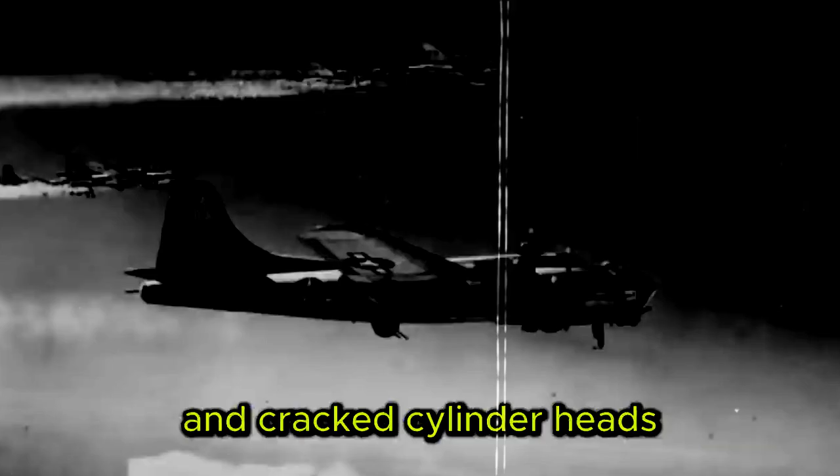Not the clean, controlled combustion that turned propellers and won dogfights, but pre-ignition, the uncontrolled explosive violence that shattered pistons and cracked cylinder heads. The tachometer needle danced wildly. Cylinder head temperature spiked past 500 degrees Fahrenheit. Wagner had no choice but to abort, diving away from the Zero while his engine rattled like a machine gun with broken timing. He landed at Clark Field with 2 cylinders misfiring and metal fragments suspended in his oil.

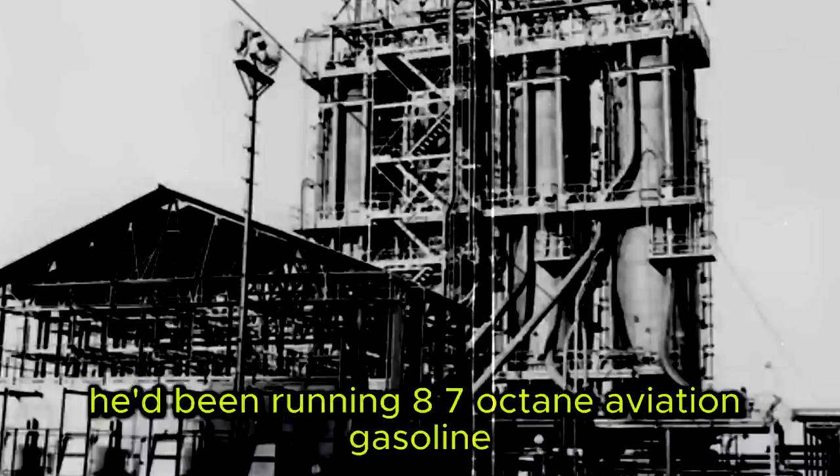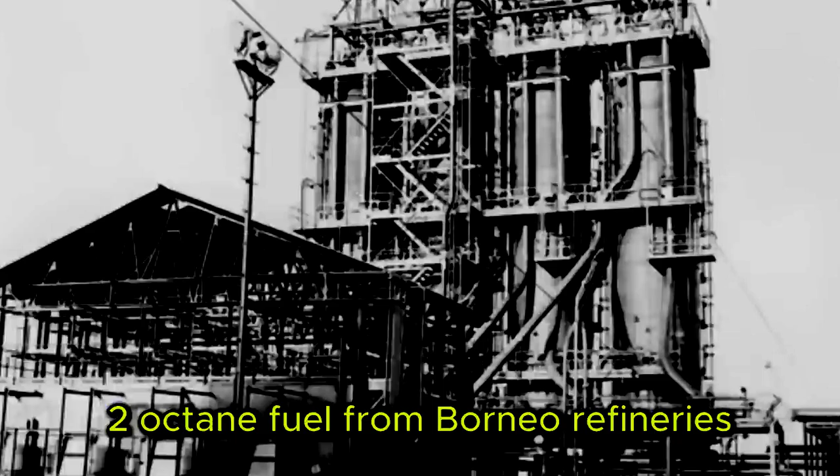The mechanics found the problem immediately. He'd been running 87 octane aviation gasoline, standard U.S. military issue, in an engine designed for sustained high-altitude performance. The Japanese Zero that escaped had been powered by 92 octane fuel from Borneo refineries captured just days earlier. Wagner survived. Hundreds of other American pilots would not. This wasn't an isolated incident. It was a mathematical certainty written into the periodic table itself.

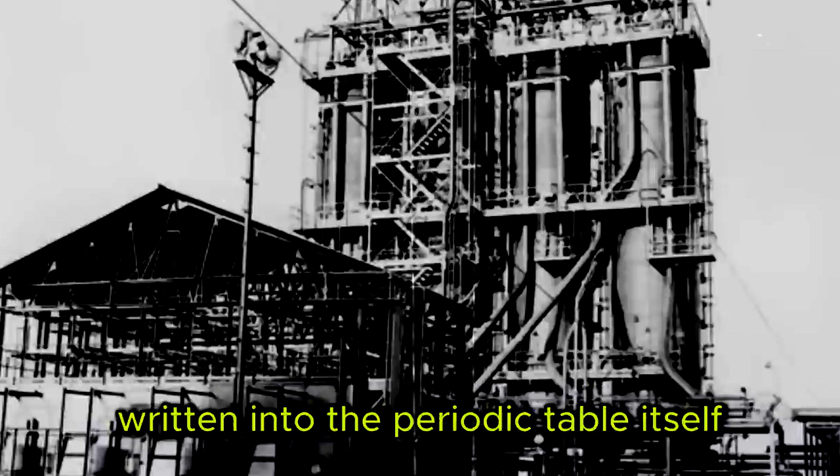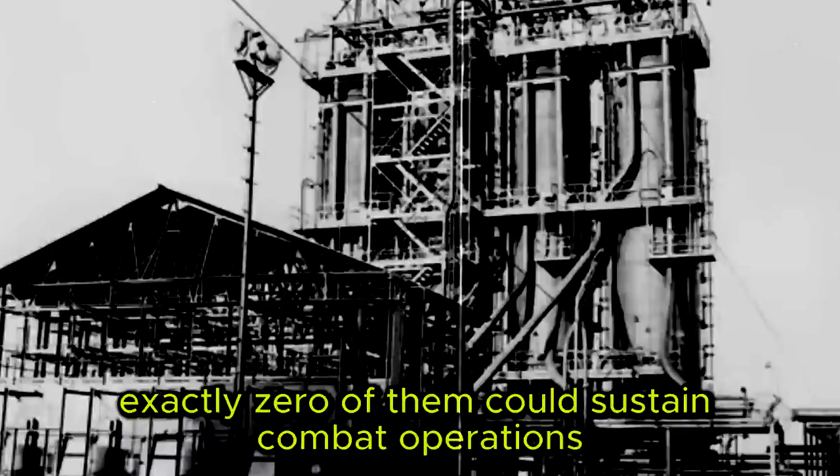In December 1941, the United States Army Air Corps had 2,846 combat aircraft. Exactly 0 of them could sustain combat operations above 20,000 feet on domestically produced fuel without risking catastrophic engine failure. The British Royal Air Force, by contrast, had been flying on 100 octane fuel since May 1940, 15 months of technological advantage that had literally saved Britain during the Battle of Britain.

American petroleum engineers understood the chemistry perfectly. They knew that octane rating measured a fuel's resistance to detonation under compression, that higher octane fuel allowed higher compression ratios and supercharger boost pressures, that every point of octane translated directly into horsepower and altitude performance.

The Merlin engines in Spitfires generated 1,470 horsepower on 100 octane British fuel. The same engine design produced barely 1,030 horsepower on 87 octane American gasoline. This wasn't a 40% performance gap. In aerial combat, it was the difference between life and death, between catching a Messerschmitt Bf 109 at 30,000 feet or watching it escape into the sun.

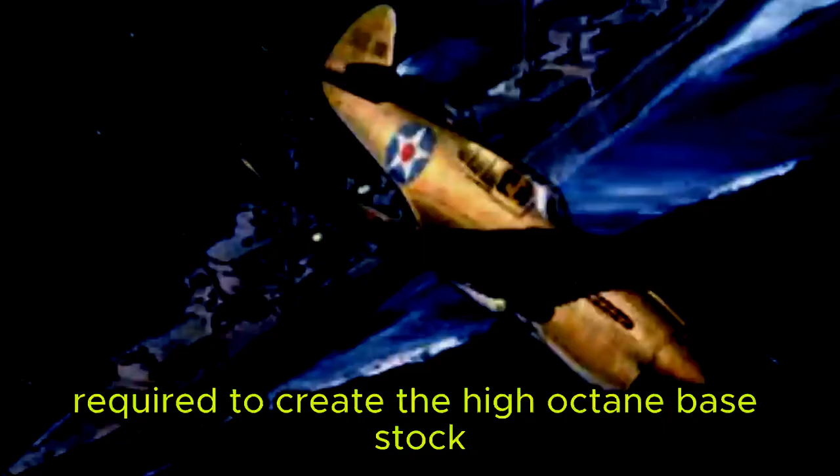But knowing the chemistry and actually producing 100 octane fuel at industrial scale were separated by a chasm of metallurgical impossibility. The problem wasn't the octane-boosting additives. Tetraethyl lead had been available since 1923, synthesized by Thomas Midgley Jr. at General Motors. The problem was the catalytic alkylation process required to create the high-octane base-stock hydrocarbons in the first place. Specifically, the problem was hydrofluoric acid.

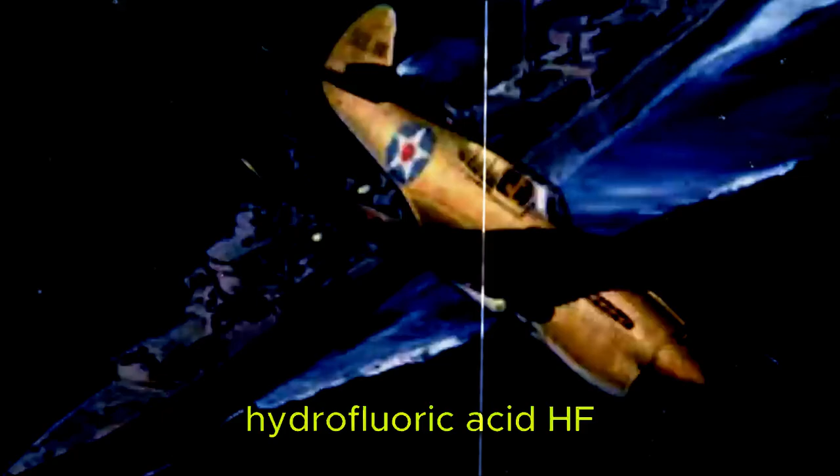To convert low-value refinery gases like butylene and isobutane into high-octane alkylate, the chemical backbone of aviation gasoline, required a catalyst so corrosive, so phenomenally reactive, that it could dissolve glass, concrete, and human tissue with equal efficiency. Hydrofluoric acid, HF, with a pKa of 3.17, attacked every known structural material. It penetrated steel through microscopic grain boundaries. It formed hydrates that expanded and cracked welds.

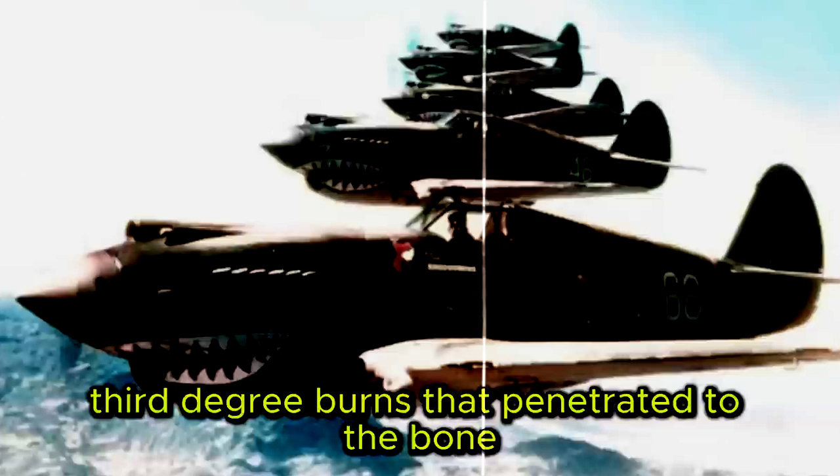At concentrations above 70%, it became hypergolic with water, releasing heat so intense that a single drop on human skin would cause third-degree burns that penetrated to the bone, often requiring amputation. The pain was described by chemical engineers who'd experienced HF exposure as being stabbed with a red-hot knife that keeps twisting. This wasn't a substance you handled with rubber gloves and good intentions. This was a chemical weapon that happened to produce 100 octane fuel as a byproduct.

The engineering challenge was almost absurd in its difficulty. To produce aviation gasoline at the volumes required for global war, the U.S. would eventually consume 20 billion gallons between 1942 and 1945, required alkylation reactors operating continuously at 35-50 degrees Fahrenheit, maintaining precise temperature control, while circulating thousands of gallons per hour of a substance that could eat through quarter-inch steel plate in under 48 hours of contact.

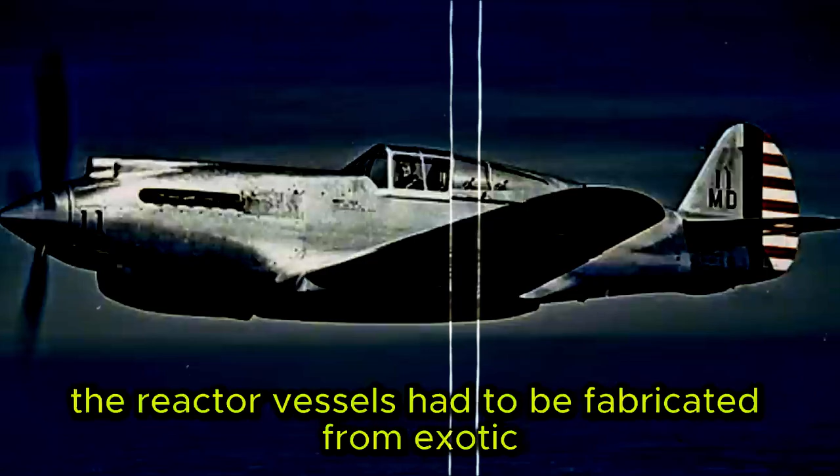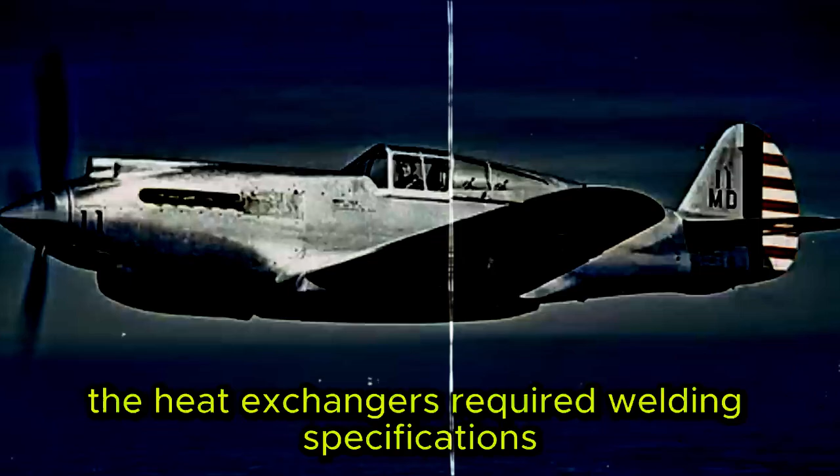The reactor vessels had to be fabricated from exotic nickel alloys that in 1940 were barely available for laboratory equipment, let alone 50-foot-tall industrial towers processing 5,000 barrels per day. The heat exchangers required welding specifications so precise that a single microscopic crack would allow HF to contact cooling water, creating hydrofluoric acid vapor clouds capable of killing refinery workers half a mile downwind.

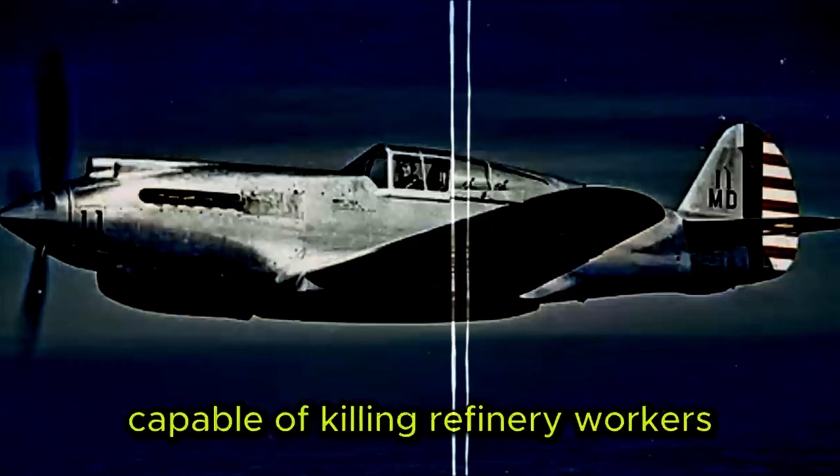The safety protocols required isolation valves that could seal in milliseconds, pressure relief systems that could vent catastrophic failures without creating toxic clouds, and emergency shutdown procedures that could freeze the entire process before acid contact exceeded critical exposure limits.

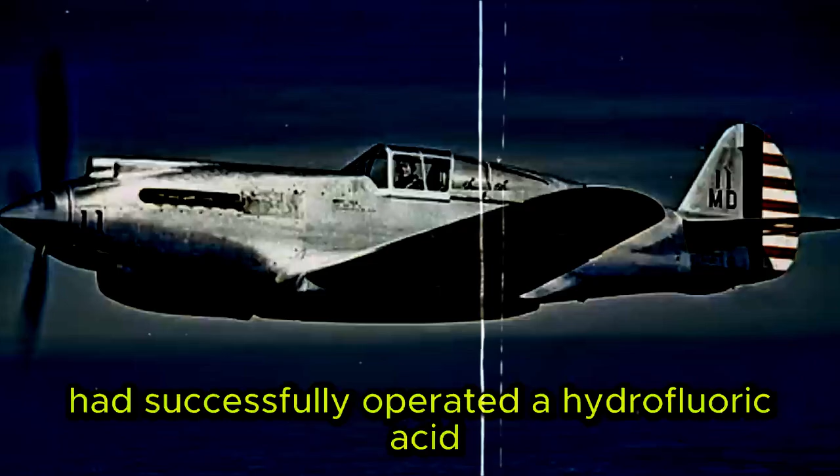In 1940, exactly one company in the world had successfully operated a hydrofluoric acid alkylation unit at commercial scale. It was Plant 5 at the Humble Oil Refinery in Baytown, Texas, and it had the production capacity to fuel approximately 400 fighter aircraft.

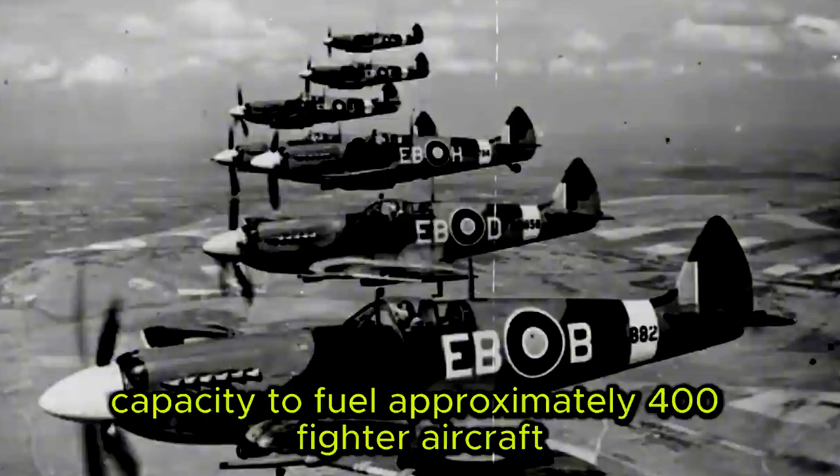Total, not per day. Total. The company that built that first impossible reactor would become the architect of America's chemical warfare against the Luftwaffe, though their weapon was never dropped from a bomb bay.

They were the M.W. Kellogg Company of New York, and in 1940 they employed exactly 847 people, most of them welders and pipe fitters, who'd spent the Depression building petroleum crackers and distillation towers. Their chief chemical engineer was a 42-year-old MIT graduate named Robert T. Haslam, who'd written his doctoral thesis on catalytic cracking in 1926 and understood petroleum chemistry the way a concert pianist understands chord progressions. Not as academic theory, but as physical intuition developed through thousands of hours of failure.

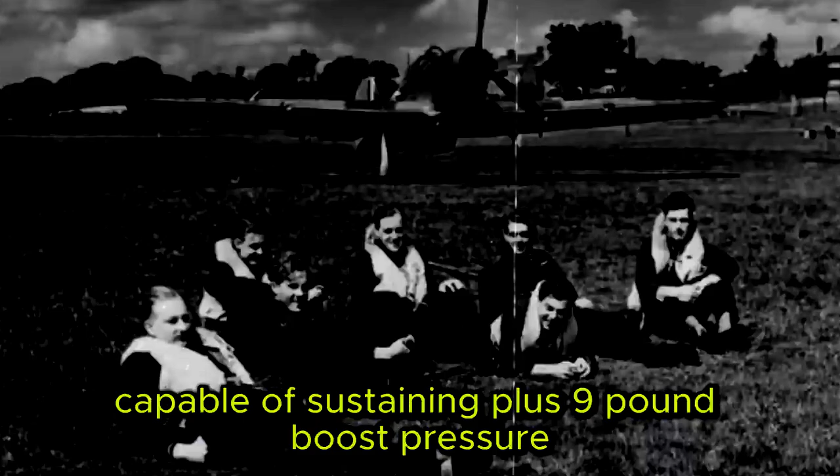Haslam had been experimenting with hydrofluoric acid alkylation since 1938, working with patents originally developed by British chemist Jesse Dubbs and later refined by the Anglo-Iranian Oil Company. The British had cracked the octane problem first, motivated by the same military necessity that would later drive American development. In 1935, the Air Ministry had issued specification DTD-224 requiring aviation fuel capable of sustaining plus 9-pound boost pressure in supercharged Merlin engines, an impossible requirement for conventional gasoline that detonated violently above plus 3 pounds.

The solution was alkylate blending, and by 1939, Britain had 6 operating HF alkylation units producing 60 million gallons annually. When France fell in June 1940 and the Battle of Britain began, every Spitfire and Hurricane that climbed to intercept the Luftwaffe was burning British 100 octane fuel, a strategic advantage as decisive as radar and as invisible as radio waves. The Americans were 3 years behind, and the gap was widening.

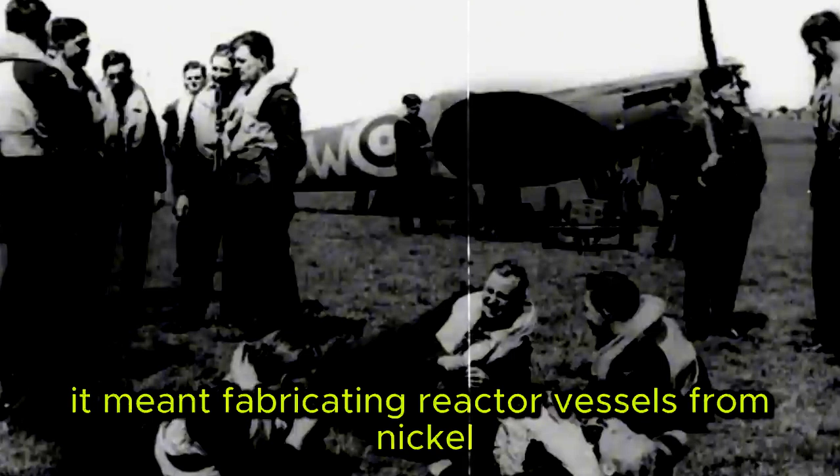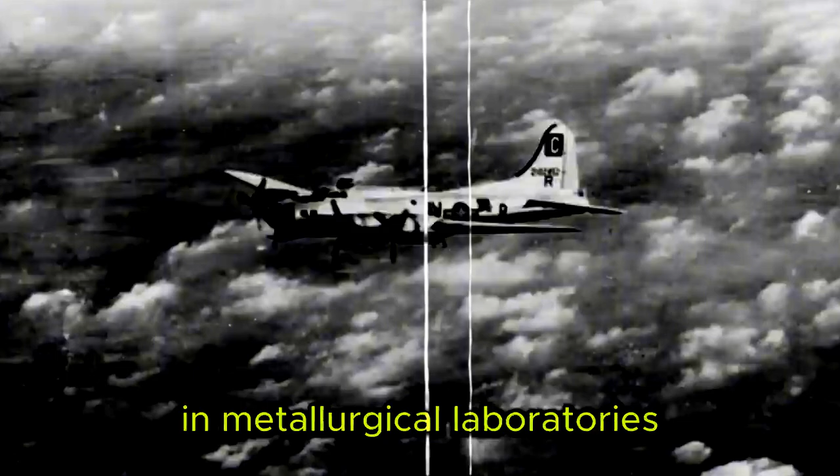It meant fabricating reactor vessels from nickel-molybdenum alloys that were still experimental in metallurgical laboratories. It meant training thousands of chemical operators to handle a substance so dangerous that a single procedural error could kill everyone within 200 yards. It meant solving corrosion problems that had defied every material scientist in the petroleum industry.

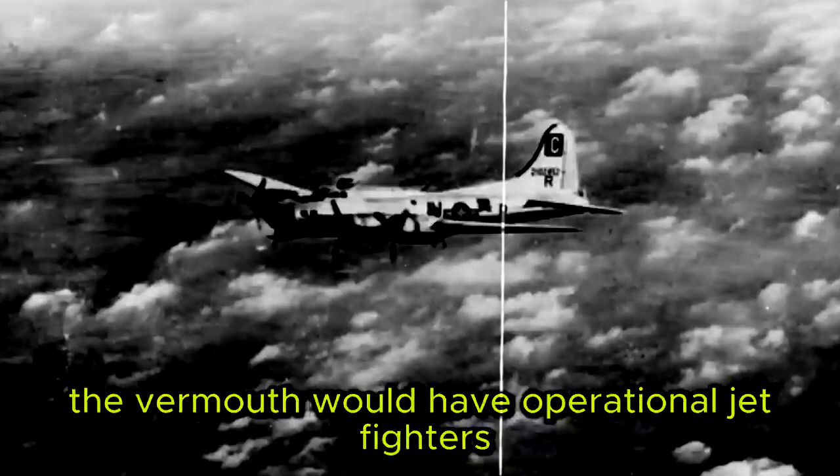And it meant doing all of this in 18 months, because by January 1942, American intelligence estimates suggested the Wehrmacht would have operational jet fighters by 1944, and piston engines running on 87 octane fuel would be obsolete before they left the assembly line. Robert Haslam understood the stakes with crystalline clarity.

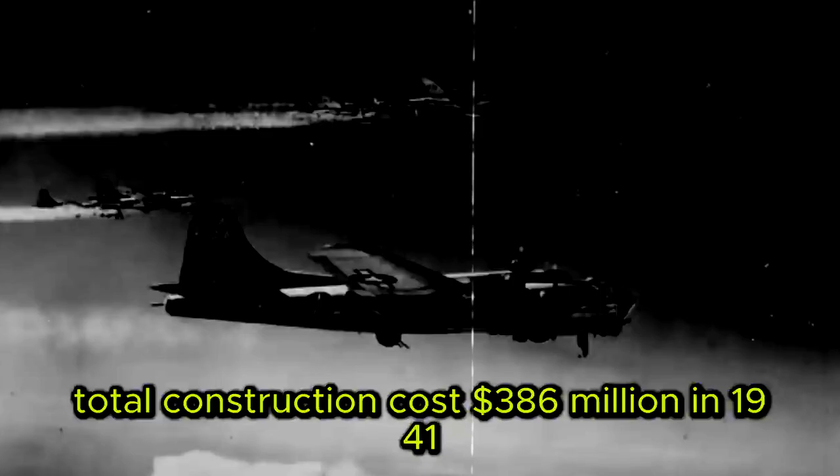On February 3, 1941, 9 months before Pearl Harbor, he stood in a conference room at the Petroleum Administration for War in Washington, D.C., and presented a proposal that would have seemed insane to anyone who hadn't spent 15 years wrestling with petroleum chemistry. He proposed building 40 HF alkylation units in 24 months, each capable of producing 15,000 barrels per day of alkylate base stock. Total construction cost $386 million in 1941, equivalent to $8.2 billion today.

Total hydrofluoric acid inventory across all facilities, 47 million pounds in continuous circulation. Total potential casualties in the event of catastrophic failure, incalculable, but likely in the tens of thousands if a major release occurred near a populated area. The procurement officer from the War Department asked the obvious question, "Mr. Haslam, what happens if one of these reactors fails in, say, Baton Rouge or Los Angeles?" Haslam's answer was documented in the meeting minutes. "We design them not to fail, sir, because the alternative is losing the war."

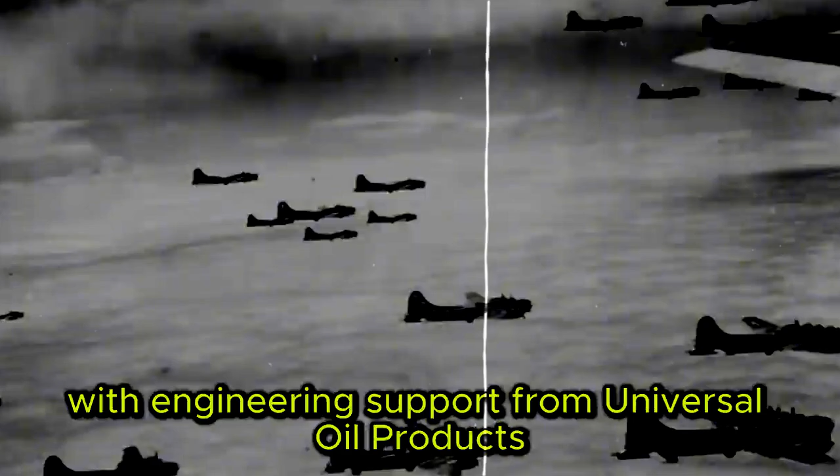After the contract was signed on March 15, 1941, M.W. Kellogg would serve as primary contractor, with engineering support from Universal Oil Products, Standard Oil of New Jersey, and the Anglo-Iranian Oil Company, which agreed to share British alkylation patents under Lend-Lease provisions. Construction began simultaneously at 17 refinery sites across Texas, Louisiana, California, Oklahoma, and Pennsylvania.

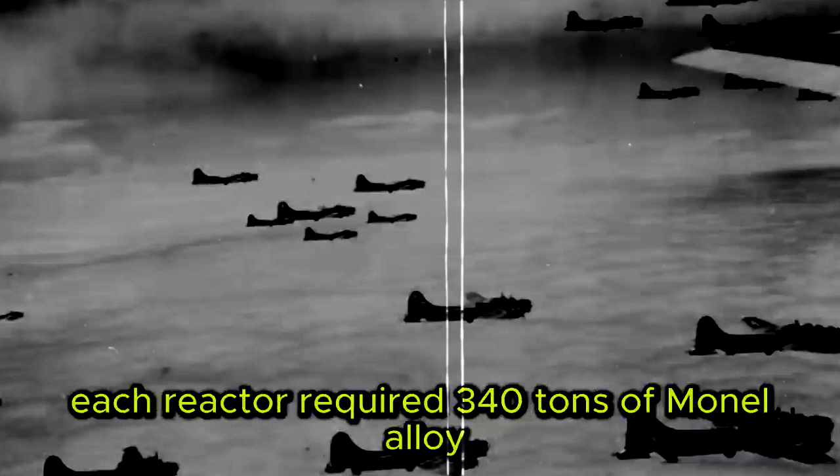The first challenge was materials procurement. Each reactor required 340 tons of Monel alloy, a nickel-copper composite containing 67% nickel, 30% copper, and 3% iron, with corrosion-resistant specifications so tight that a variance of 0.5% in nickel content would reduce acid resistance by 40%.

They agreed to divert their entire 1941 output to alkylation reactor fabrication in exchange for guaranteed War Department contracts through 1945. By June, Monel ingots were arriving at fabrication plants in Philadelphia and Gary, Indiana, where they were forge-welded into cylindrical shells 12 feet in diameter and 48 feet tall, with wall thickness varying from 2 inches at the base to 1.25 inches at the top to account for pressure gradients.

The welding specifications alone filled a 247-page manual. Every seam required X-ray inspection at 200 kilovolts penetration to detect micro cracks larger than 0.003 inches. Every weld had to be stress-relieved at 1600 degrees Fahrenheit for 14 hours, then cooled at exactly 100 degrees Fahrenheit per hour to prevent crystalline grain boundary formation that would create acid migration pathways.

The welders themselves required 6 months of specialized training because Monel welding behavior was fundamentally different from steel. The metal had to be preheated to 400 degrees Fahrenheit, welded with argon shielding gas to prevent oxidation, and post-treated with pickling solutions to remove surface contaminants.

A single contaminated weld could create a corrosion cell that would penetrate the reactor wall in 6 weeks of operation, releasing thousands of gallons of hydrofluoric acid into a refinery processing volatile hydrocarbons at 800 degrees Fahrenheit. The consequences would make the Hindenburg disaster look like a stovetop accident.

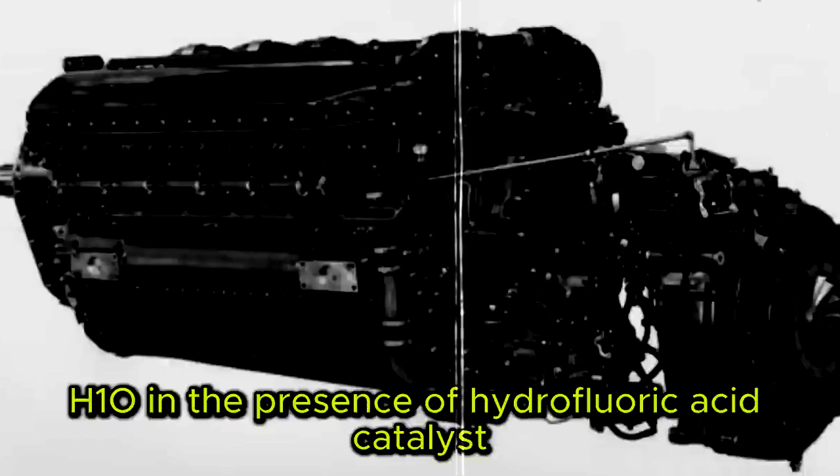While the reactors were being fabricated, Haslam's engineers were solving the even more complex problem of how the alkylation process actually worked at the molecular level. The chemistry was deceptively simple on paper. Combine isobutane, C4H10, with butylene, C4H8, in the presence of hydrofluoric acid catalyst, and the result was iso-octane, C8H18, a branched-chain hydrocarbon with an octane rating of 100, but the reaction pathway was anything but simple.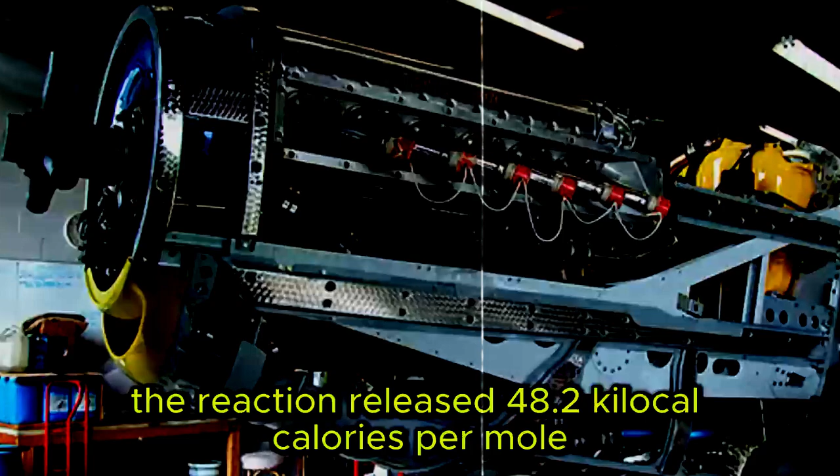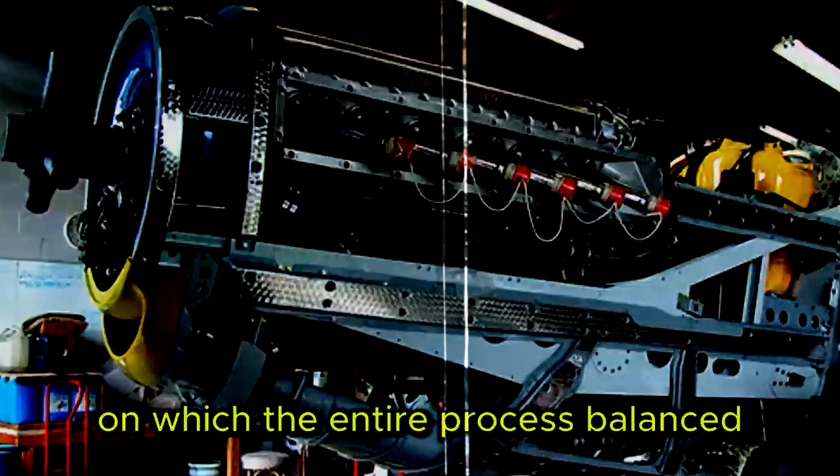The reaction released 48.2 kilocalories per mole, and that heat had to be removed continuously or the entire reactor would enter thermal runaway, boiling the hydrocarbons and creating a pressure wave that would rupture the vessel. Temperature control was the knife edge on which the entire process balanced. At 32 degrees Fahrenheit, the reaction rate slowed to commercially useless levels. Producing alkylate required 14 hours of residence time instead of 2.

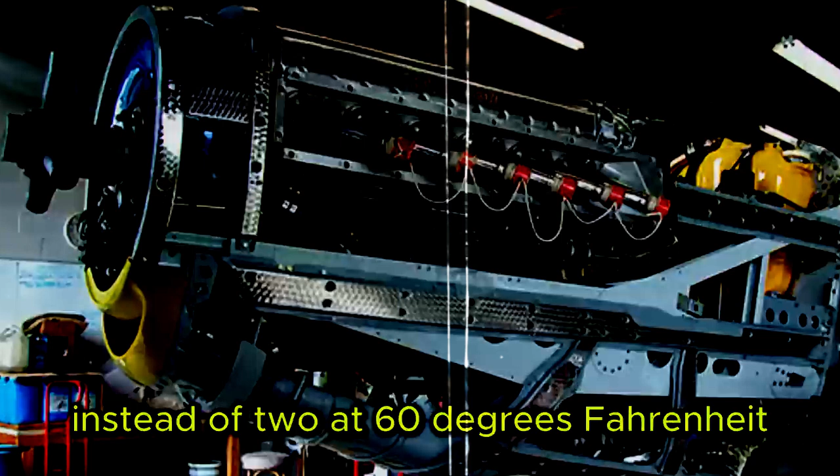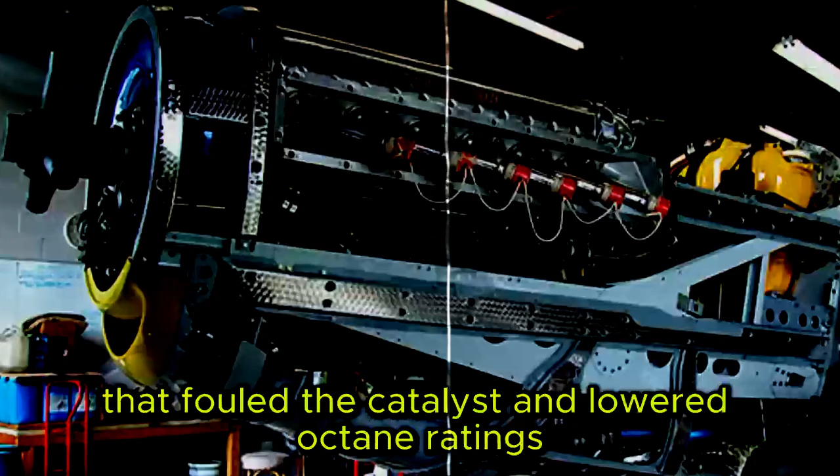At 60 degrees Fahrenheit, the reaction accelerated but selectivity collapsed. Instead of forming clean isooctane, the carbocation intermediates underwent rearrangement reactions, creating a mixture of heptanes, hexanes, and polymer tars that fouled the catalyst and lowered octane ratings. The optimal temperature window was 38 to 42 degrees Fahrenheit, maintained within ±1.5 degrees Fahrenheit across the entire reactor volume.

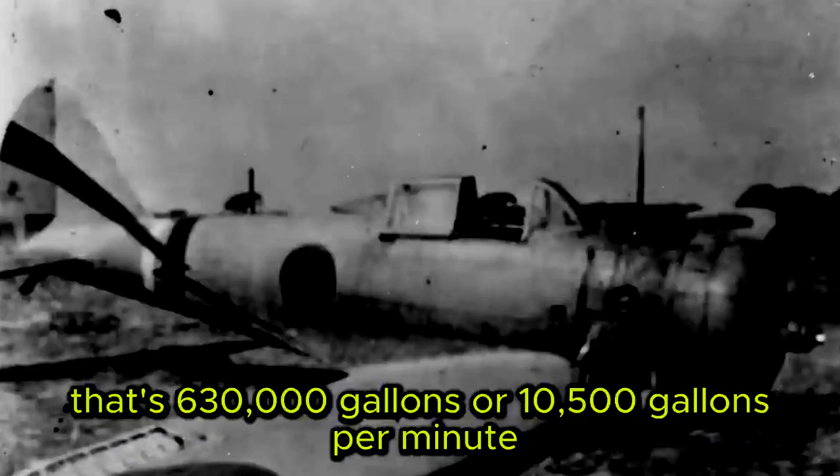In a vessel processing 15,000 barrels per day, that's 630,000 gallons or 10,500 gallons per minute. Maintaining that thermal precision required heat exchanger surface area equivalent to a football field, with coolant flow rates of 50,000 gallons per minute of chilled water. The cooling system consumed 12 megawatts of power per reactor, more than the entire electrical demand of a town of 15,000 people.

Multiply that by 40 reactors, and the alkylation program required the construction of 6 dedicated power plants with a combined output of 480 megawatts, roughly equivalent to the electrical generation capacity of the entire state of Nevada in 1941. The acid circulation system was perhaps the most terrifying piece of engineering ever deployed in American industry.

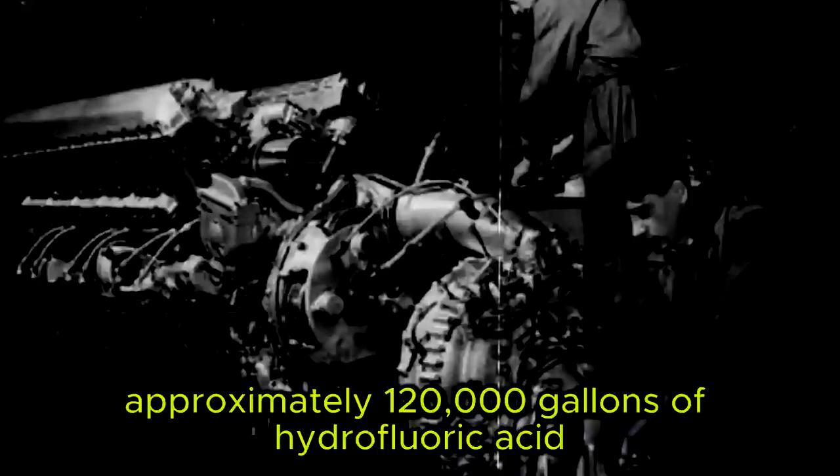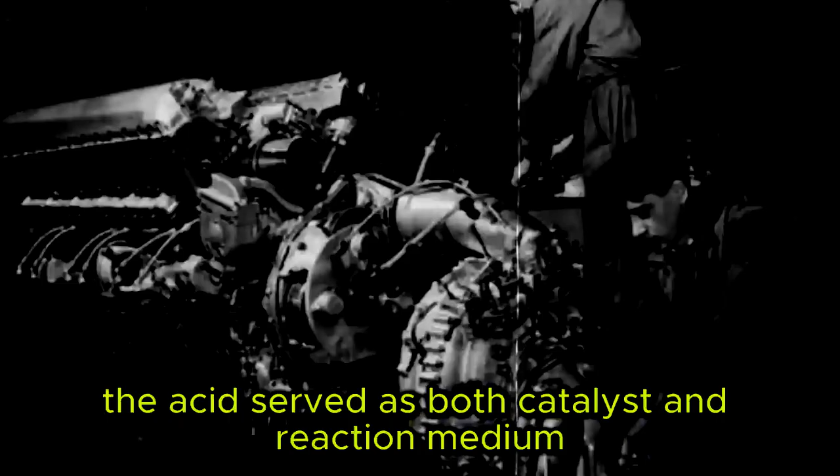Each reactor contained approximately 120,000 gallons of hydrofluoric acid, circulating at 8,000 gallons per minute through a closed-loop system of pumps, heat exchangers, and separation vessels. The acid served as both catalyst and reaction medium, absorbing the hydrocarbon feed at the bottom of the reactor and releasing purified alkylate at the top. But hydrofluoric acid wasn't a stable, well-behaved chemical. It absorbed water from the hydrocarbon feed.

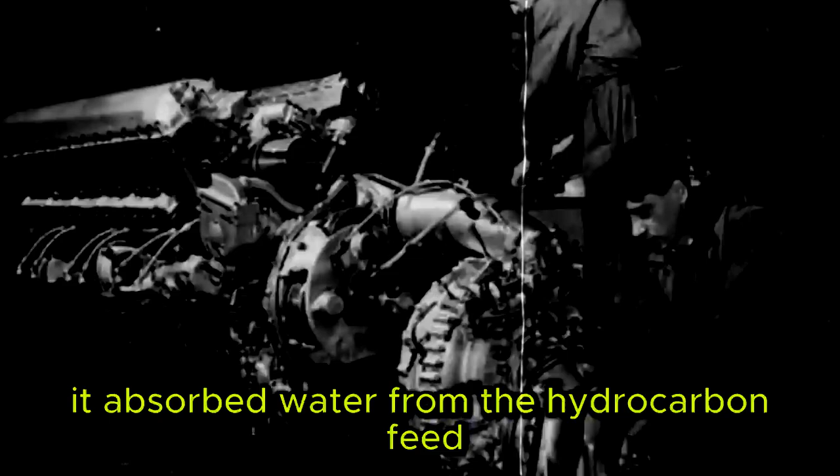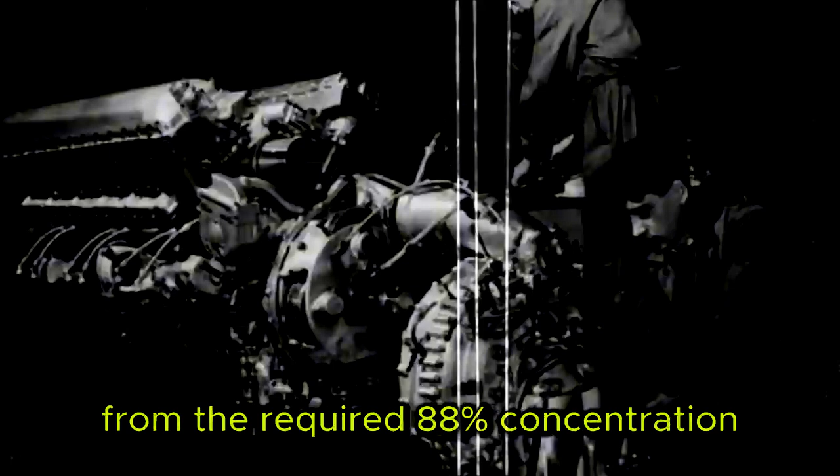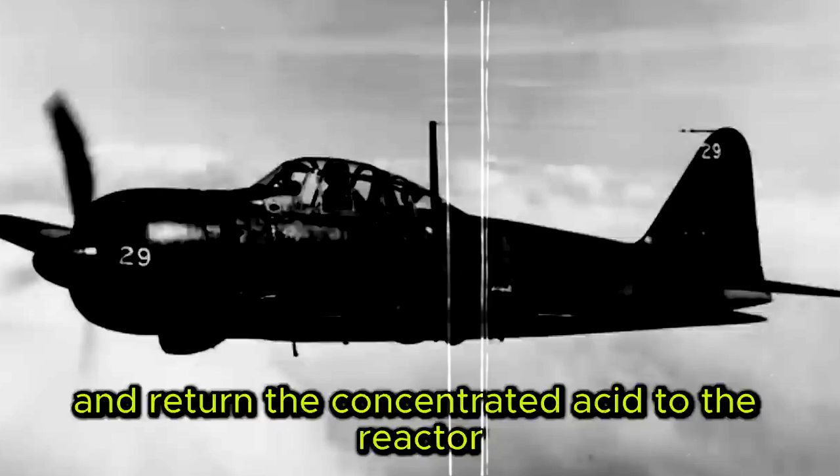Typical refinery streams contained 50 to 200 parts per million of water, and that water diluted the acid strength from the required 88% concentration down to levels where catalytic activity collapsed. Every 24 hours, operators had to drain 3,000 gallons of contaminated acid, distill off the water in a specialized reboiler operating at 150 degrees Fahrenheit and 40 psi, and return the concentrated acid to the reactor. This distillation process created anhydrous hydrofluoric acid vapor at concentrations lethal in under 30 seconds of exposure.

The reboiler was housed in a sealed concrete bunker with 18-inch walls, accessed only through a pressure-locked vestibule, and monitored by closed-circuit cameras. The operators who performed acid transfers wore rubberized suits with external air supply, looking like early astronauts exploring a toxic alien planet, which, chemically speaking, they were.

The safety protocols developed for HF alkylation units read like a military operations manual, because chemically these facilities were weapons platforms deployed on American soil. Every unit had a dead man switch system. An operator had to physically press a button every 60 seconds, or the entire reactor automatically initiated emergency shutdown.

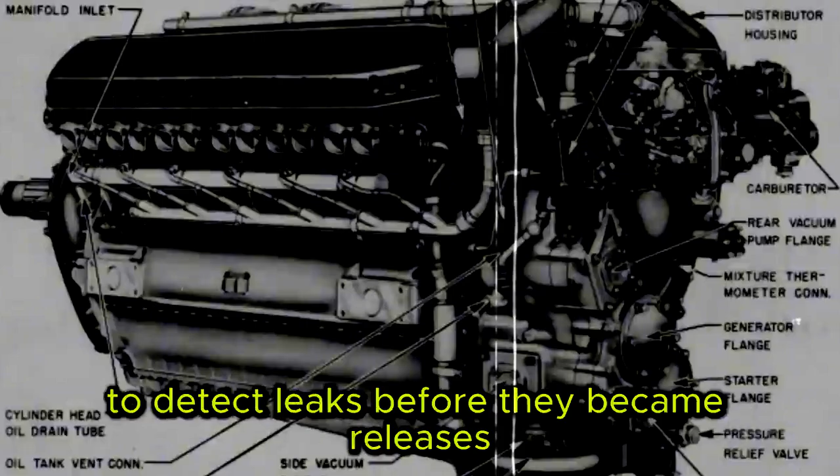Every pipe flange was equipped with dual seals and intermediate pressure monitoring to detect leaks before they became releases. Every reactor had a deluge system capable of flooding the entire vessel with 100,000 gallons of water in 90 seconds, neutralizing the acid through dilution, though this created its own hazard, as the exothermic heat of dilution could flash boil the water and create a pressure surge.

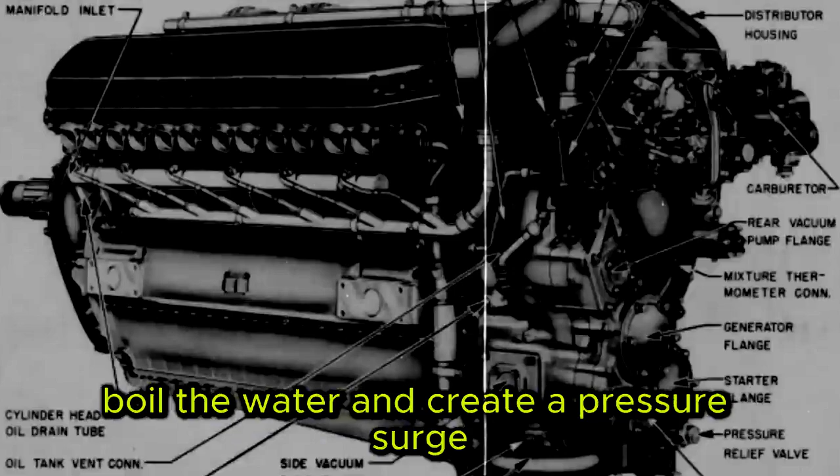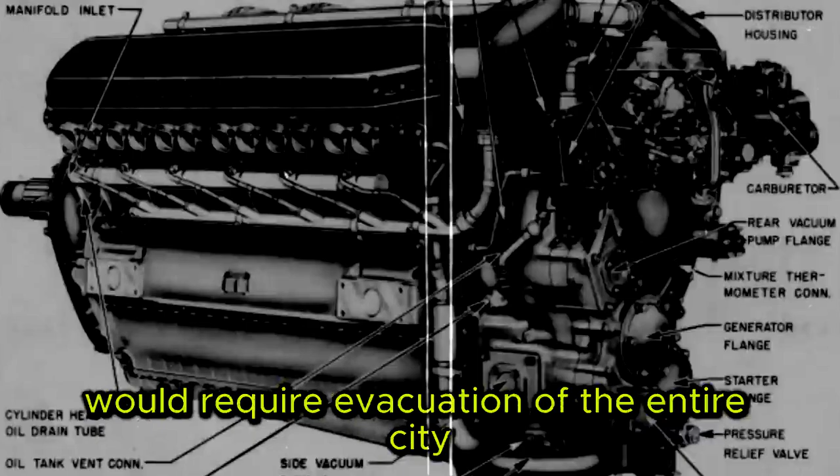The emergency response protocol assumed that any HF release larger than 50 pounds would require evacuation of all personnel within a half-mile radius and notification of civil authorities. A catastrophic release, defined as more than 5,000 pounds, would require evacuation of the entire city.

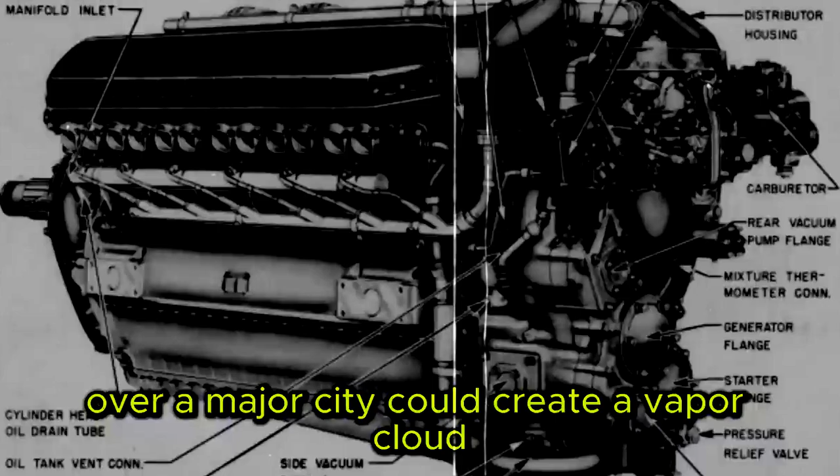Engineers calculated that a worst-case failure of a fully loaded reactor, if it occurred with unfavorable wind conditions over a major city, could create a vapor cloud containing 240,000 pounds of hydrofluoric acid dispersed over 15 square miles, with lethal concentrations extending 6 miles downwind. This was not a hypothetical scenario designed to scare regulators. It was a thermodynamic certainty based on vapor pressure calculations and atmospheric dispersion modeling. The only thing preventing it was weld quality, materials science, and procedural discipline.

Between March 1941 and December 1942, M.W. Kellogg constructed 41 HF alkylation units at a pace that remains unmatched in chemical engineering history. The first unit at the Humble Baytown refinery went operational on September 14, 1941, producing 13,200 barrels per day of alkylate, within specifications. The second, at Standard Oil's Baton Rouge facility, came online October 3rd.

By December 7, 1941, the day of Pearl Harbor, 7 units were operational with a combined capacity of 98,000 barrels per day. By June 1942, 18 units were running. By December 1942, all 41 were in operation, producing 615,000 barrels per day of alkylate base stock, which when blended with catalytically cracked gasoline and tetraethyl lead, yielded 840,000 barrels per day of 100 octane aviation gasoline.

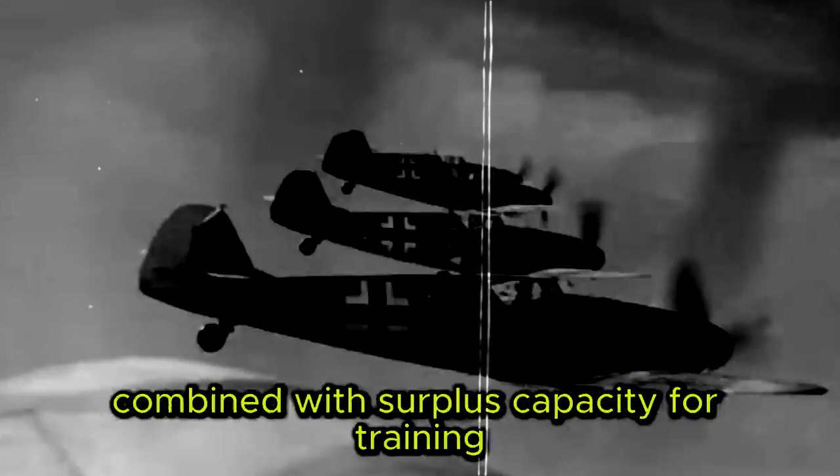That's 35.28 million gallons per day, 12.9 billion gallons per year, enough to fuel every combat aircraft in the U.S., British, and Soviet Air Forces combined, with surplus capacity for training operations and strategic reserves. The production statistics tell only part of the story. The real miracle was reliability.

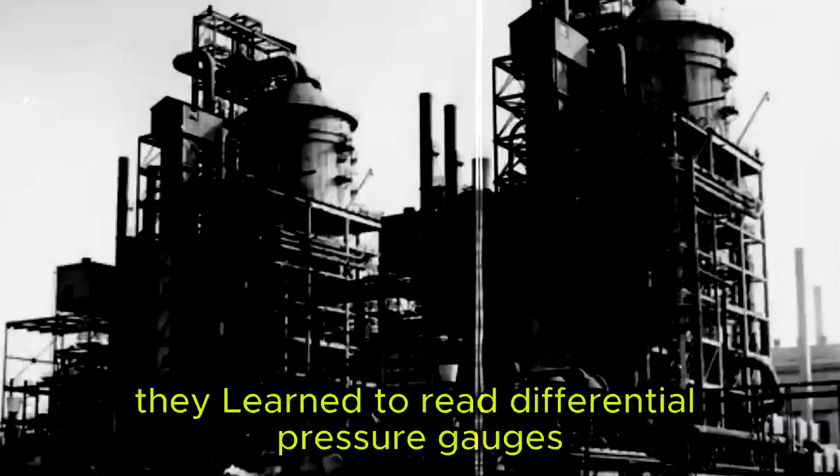These were not laboratory-scale demonstration units babied by PhDs in white coats. These were industrial installations operated 24 hours a day, 365 days per year, by shift workers with high school educations, many of whom had been farm laborers or steel mill operators before the war. They learned to read differential pressure gauges and temperature controllers, to sample acid strength using hydrometer readings, to recognize the subtle changes in reactor sound that indicated fouling or cavitation.

The training program developed by Kellogg and implemented across all 41 facilities was 16 weeks long, longer than Army basic training, and had a failure rate of 38%. This wasn't because the trainees were incompetent. It was because operating an HF alkylation unit required a level of chemical intuition and procedural discipline that most people simply didn't possess.

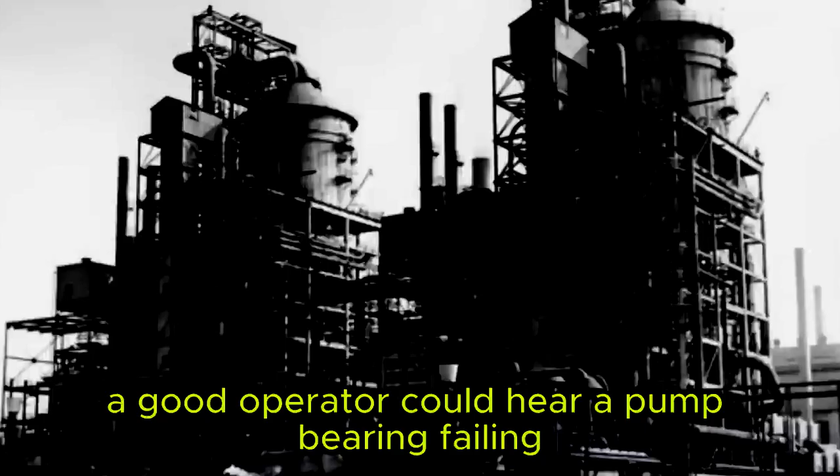A good operator could hear a pump bearing failing 12 hours before it seized, could smell a trace HF leak at concentrations below detector sensitivity, could feel through vibration in the metal handrails that heat exchanger flow was becoming asymmetric. This knowledge couldn't be taught from manuals. It had to be absorbed through hundreds of hours of supervised operation, learning the personality of the equipment the way a pilot learns the handling characteristics of a specific aircraft.

The safety record, given the inherent hazards, was almost miraculous. Between 1941 and 1945, across all 41 HF alkylation units representing 164 reactor years of operation, there were exactly 3 fatalities directly attributable to hydrofluoric acid exposure.

The first occurred at the Phillips Petroleum Plant in Borger, Texas, on July 23, 1942, when a relief valve failed and sprayed acid onto a maintenance worker who was replacing flange gaskets. He received burns over 35% of his body and died 4 days later from calcium depletion. HF chelates calcium from blood and bone, causing cardiac arrhythmia.

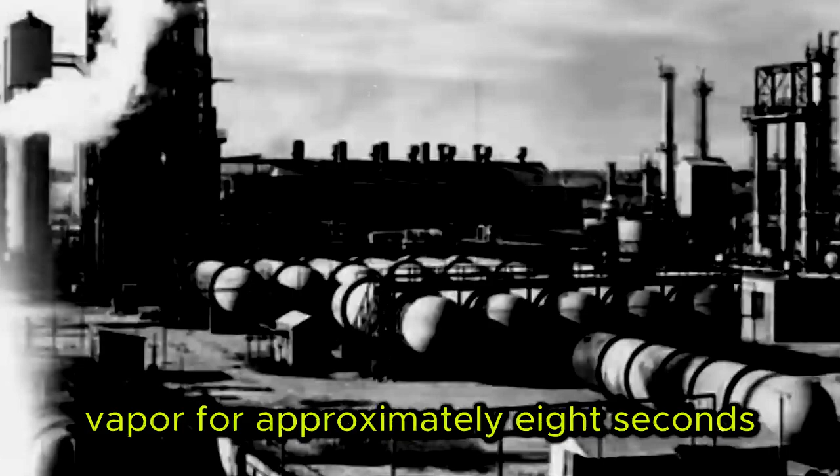The second fatality occurred at the Shell plant in Martinez, California, on March 8, 1943, when an operator opened a sample valve without first confirming the line was depressurized. He was exposed to acid vapor for approximately 8 seconds before his partner pulled him clear. He died from pulmonary edema. The acid dissolved his lung tissue.

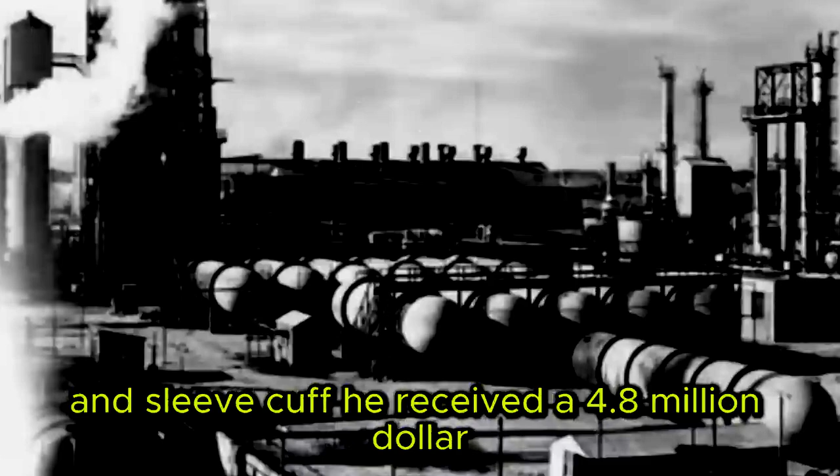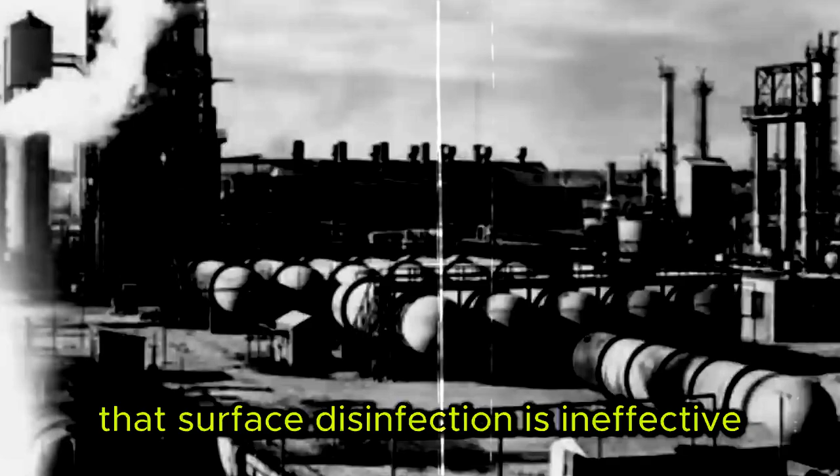square inch burn on his wrist. He survived the initial injury but died 6 weeks later from infection. HF burns are nearly impossible to sterilize because the acid penetrates so deeply that surface disinfection is ineffective. 3 deaths in 4 years of operating the most dangerous chemical process ever deployed at industrial scale.

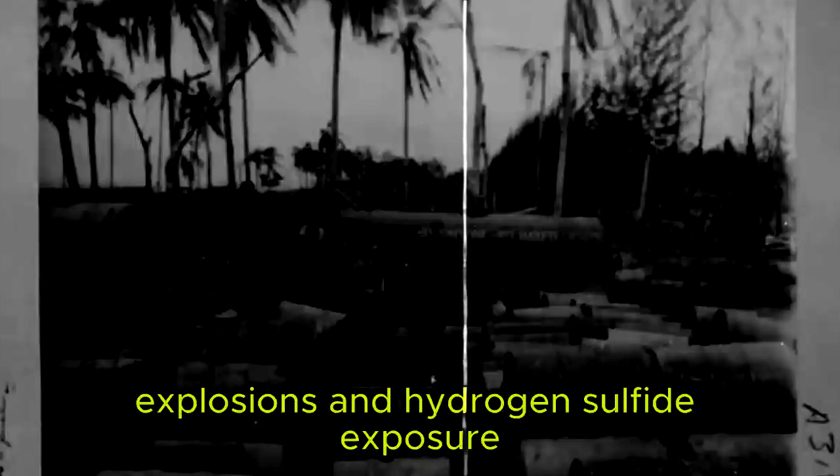By comparison, the petroleum industry in the same period lost 847 workers to refinery accidents involving fires, explosions, and hydrogen sulfide exposure. Coal mining killed 6,200 workers. Aircraft manufacturing killed 1,340. The HF alkylation program's safety record was a testament not to the forgiving nature of the chemistry. Hydrofluoric acid is fundamentally unforgiving, but to the obsessive engineering culture that M.W. Kellogg and its operating partners enforced.

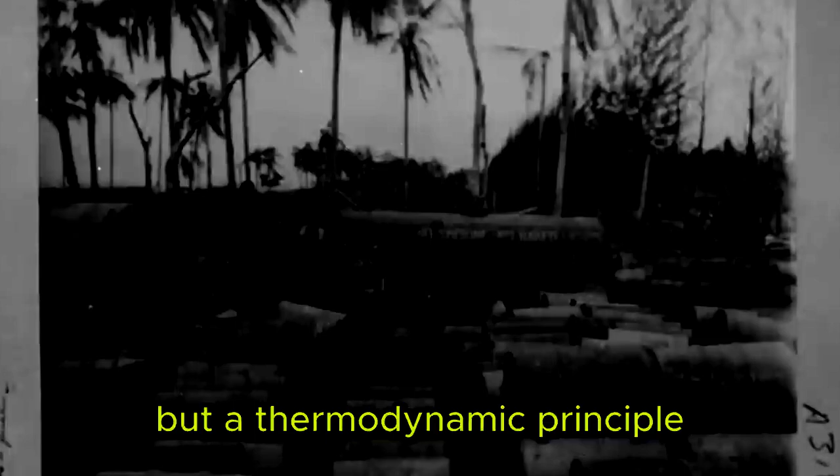Every near miss was investigated as thoroughly as a fatality. Every procedural deviation resulted in immediate shutdown and retraining. Every maintenance operation was planned with the assumption that Murphy's Law was not a joke, but a thermodynamic principle. The result was a safety culture that would later become the foundation for the entire petrochemical industry's approach to hazardous materials handling. The impact on the air war was immediate and overwhelming.

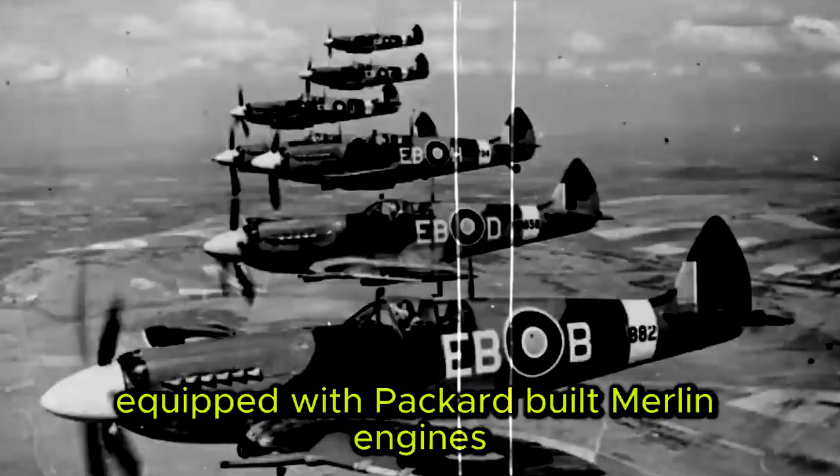In May 1942, the first P-51 Mustangs, equipped with Packard-built Merlin engines, began arriving in England, powered by American 100 octane fuel. The performance difference was startling. The Merlin V-1650-7 engine, running on 100 octane with 25 pounds boost pressure, generated 1,695 horsepower at 3,000 RPM, a 64% increase over the same engine on 87 octane fuel.

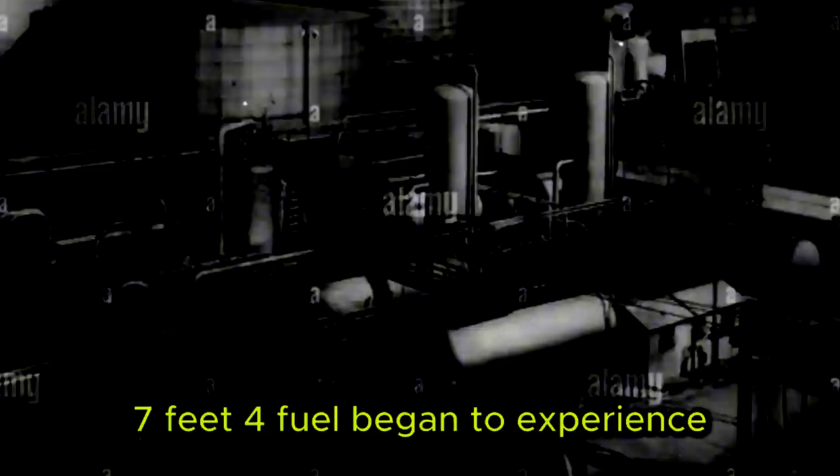That translated into a top speed of 437 miles per hour at 25,000 feet, making the P-51 the fastest operational fighter in the world. More critically, the 100 octane fuel allowed sustained combat operations at altitudes above 30,000 feet, where German interceptors running on 87 octane fuel began to experience the same detonation problems that had plagued early American fighters.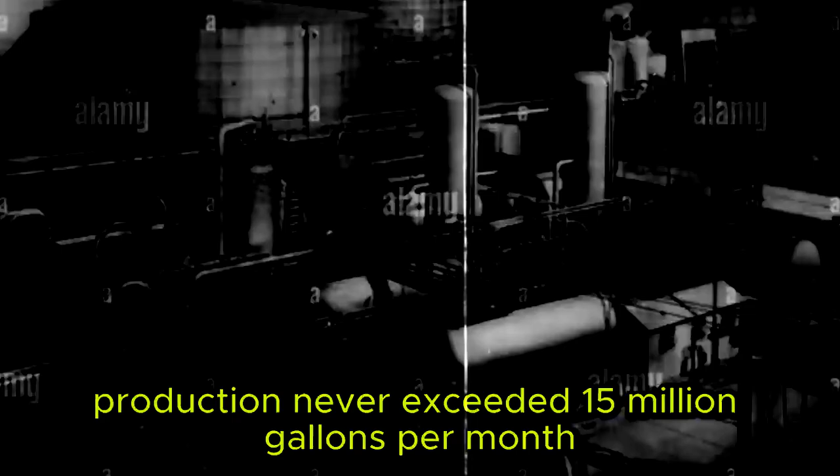By 1943, the Luftwaffe had developed C3 fuel, 96-octane equivalent, but production never exceeded 15 million gallons per month, compared to American production of 1.3 billion gallons per year. The Germans were trying to fight a chemistry war with Bavarian distilleries, while the Americans were operating chemical weapons plants disguised as oil refineries. The strategic bombing campaign against Germany would have been impossible without HF alkylation.

Each B-17 Flying Fortress consumed 1,700 gallons of 100 octane fuel for a maximum range mission to Berlin and back. A typical 8th Air Force raid in 1944 involved 1,200 bombers plus 800 escort fighters, consuming 3.8 million gallons of fuel per mission. The 8th Air Force flew 332 such missions between January 1943 and May 1945, consuming approximately 1.26 billion gallons of 100 octane fuel, nearly matching the total U.S. annual production capacity in 1941. Without the alkylation program, those missions would have been impossible.

The B-17's Wright R-1820 Cyclone engines required 100 octane fuel to maintain cruise power at bombing altitude. Running on 87 octane, they could barely climb above 18,000 feet with a full bomb load, putting them well within range of German 88mm flak that was optimized for 20,000-foot intercepts. The entire strategic bombing doctrine depended on high-altitude precision, and high altitude depended on octane rating, and octane rating depended on hydrofluoric acid alkylation.

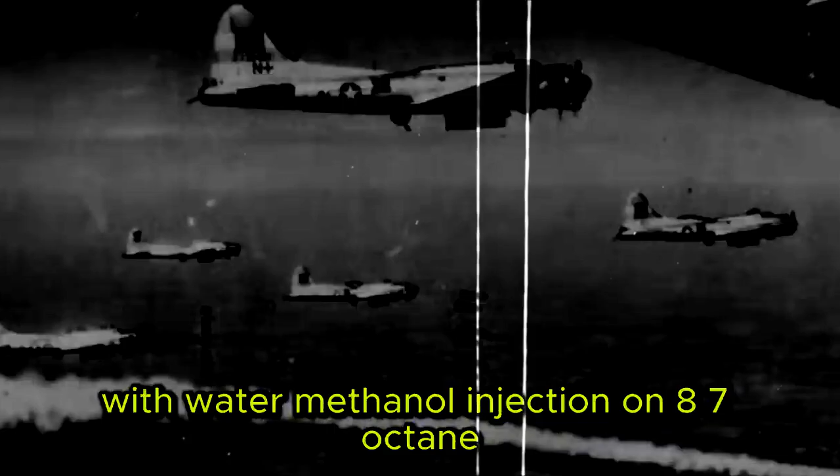The Pacific War told the same story with even more dramatic numbers. The B-29 Superfortress, the ultimate expression of American strategic air power, was completely dependent on 100 octane fuel. Its Wright R-3350 engines, the most powerful radials ever built, generated 2,200 horsepower each using 100 octane with water methanol injection. On 87 octane, they produced barely 1,400 horsepower, insufficient to lift a fully loaded B-29 off the runway at Tinian or Saipan in the tropical heat.

The firebombing of Tokyo on March 9, 1945, 334 B-29s dropping 1,665 tons of incendiaries, consumed 1.4 million gallons of 100 octane fuel. The atomic bomb missions to Hiroshima and Nagasaki each required 7,000 gallons per aircraft.

The fuel that powered the Enola Gay on August 6, 1945, was synthesized from isobutane and butylene in an HF alkylation reactor at the humble Baytown refinery, catalyzed by the same acid that could dissolve human bones, cooled to 40 degrees Fahrenheit, and purified to 99.8% purity. That fuel contained approximately 114,000 BTUs per gallon, of which 18% came directly from the alkylation process. Without that 18%, the mission would have failed before it left the ground.

The post-war legacy of HF alkylation is written in the fuel tanks of every aircraft flying today. Modern aviation gasoline, 100LL, the low-lead variant used in piston aircraft, still contains alkylate base stock, though the synthesis process has largely transitioned to sulfuric acid catalysis to reduce HF handling hazards. But the fundamental chemistry remains unchanged.

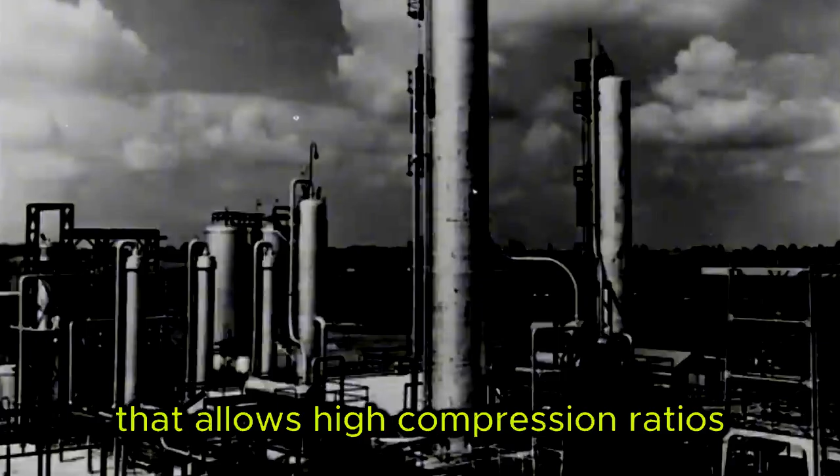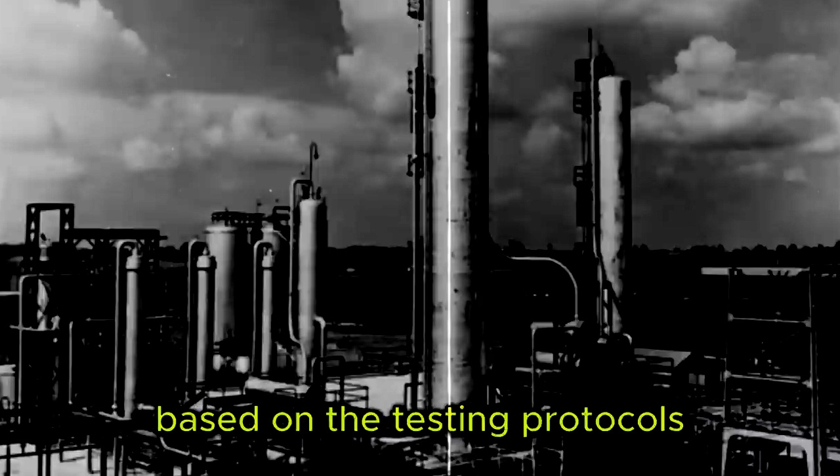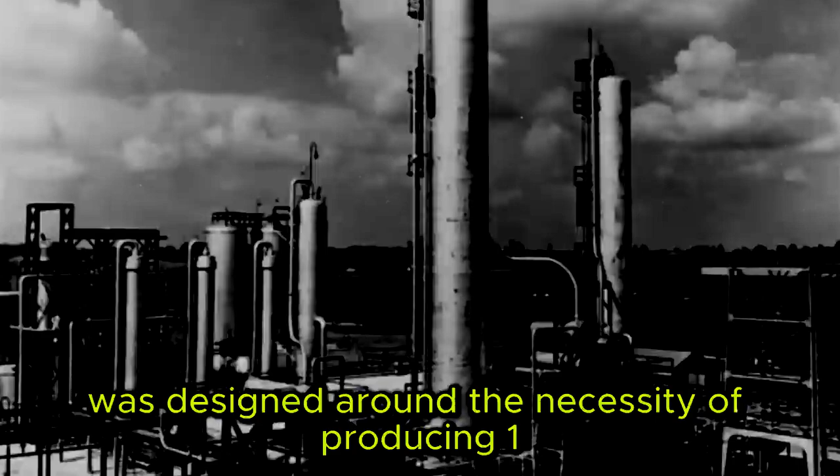Branched-chain isoparaffins synthesized through carbocation intermediates, producing the knock resistance that allows high compression ratios and supercharger boost. The octane rating itself, the RON/MON average that appears on every gas pump, was standardized in 1941 based on the testing protocols developed for wartime aviation fuel. The entire structure of modern petroleum refining, the catalytic crackers, the reformers, the alkylation units, was designed around the necessity of producing 100 octane fuel for World War II.

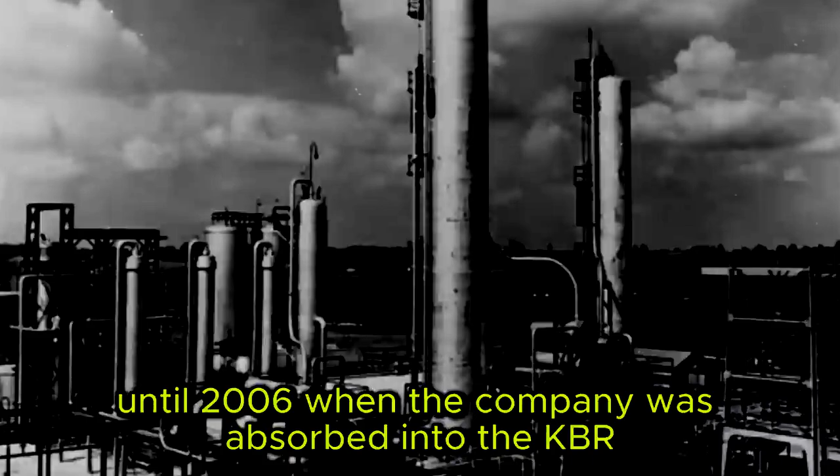The war ended in 1945. The refineries kept running, adapting their processes to peacetime demands, but the ghost of that wartime chemistry haunts every molecule of gasoline burned in a modern engine. M.W. Kellogg continued designing chemical plants until 2006, when the company was absorbed into the KBR conglomerate. Robert Haslam retired in 1955 and died in 1964, his obituary mentioning his contributions to petroleum refining in a single paragraph.

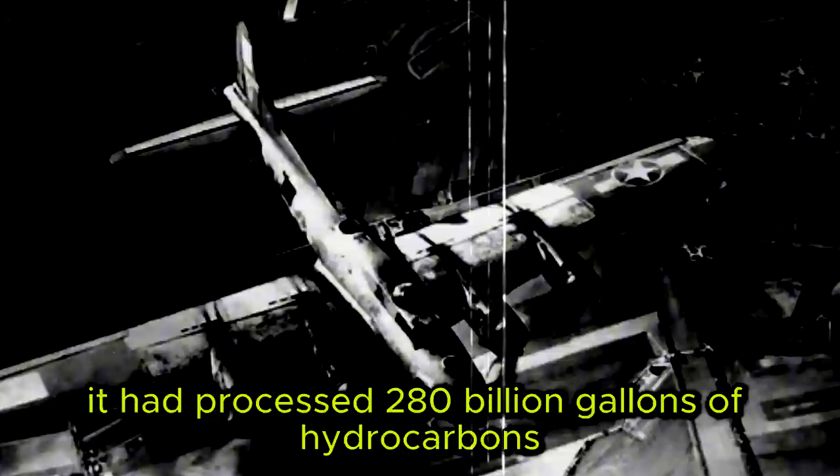The 41 HF alkylation units built between 1941 and 1942 continued operating well into the 1990s, some for more than 50 years of continuous service. The last of the original wartime reactors at the Exxon Baytown refinery, the same plant where it all started, was finally decommissioned in 2002. It had processed 280 billion gallons of hydrocarbons, produced 89 billion gallons of alkylate, and never

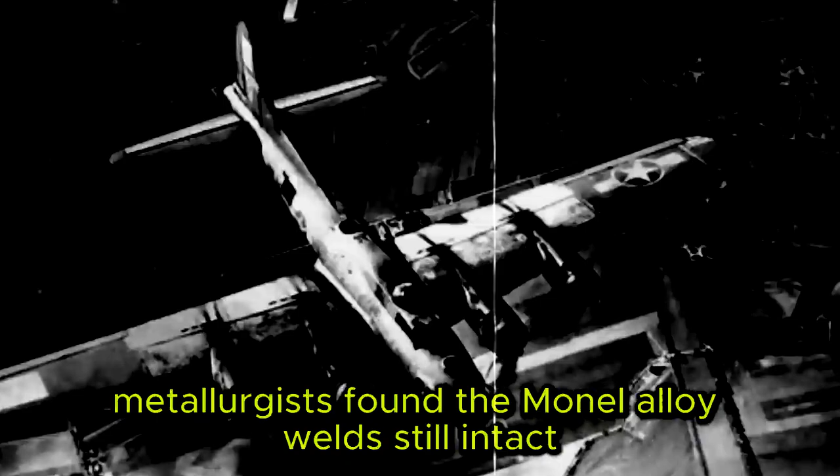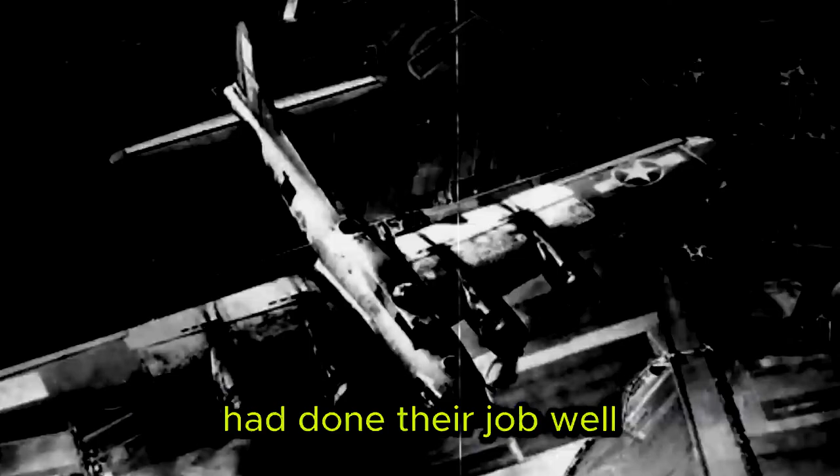experienced a catastrophic failure. When they cut it apart for scrap, metallurgists found the Monel alloy welds still intact, showing minimal corrosion after 6 decades of contact with one of the most aggressive chemicals known to materials science. The welders who fabricated that vessel in 1941 had done their job well. Today, approximately 30% of global gasoline production still passes through alkylation units, though most have transitioned to sulfuric acid catalysis or solid acid catalysts to eliminate HF handling.

The remaining HF alkylation units, there are still 47 operating in the United States, are monitored by EPA regulations so stringent that a release of more than 100 pounds triggers federal investigation. The operators who run them are the inheritors of a safety culture forged in the crucible of wartime necessity, when getting the chemistry wrong meant not just a regulatory fine, but potentially losing the war.

They understand, perhaps better than anyone, that chemistry is not an abstract science conducted in laboratories. It's a physical reality that can either power civilization or destroy it, depending entirely on the quality of the welds, the precision of the temperature control, and the discipline of the human beings who operate the equipment. The Luftwaffe never saw the chemical weapon that defeated them. It wasn't dropped from a bomb bay or fired from a cannon.

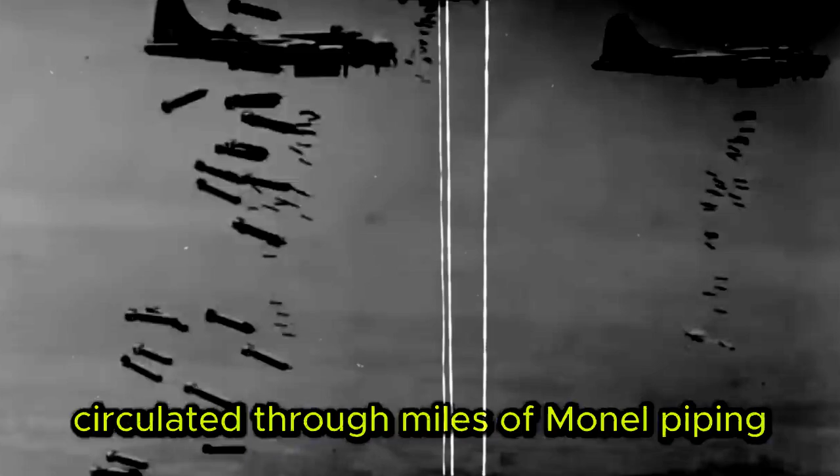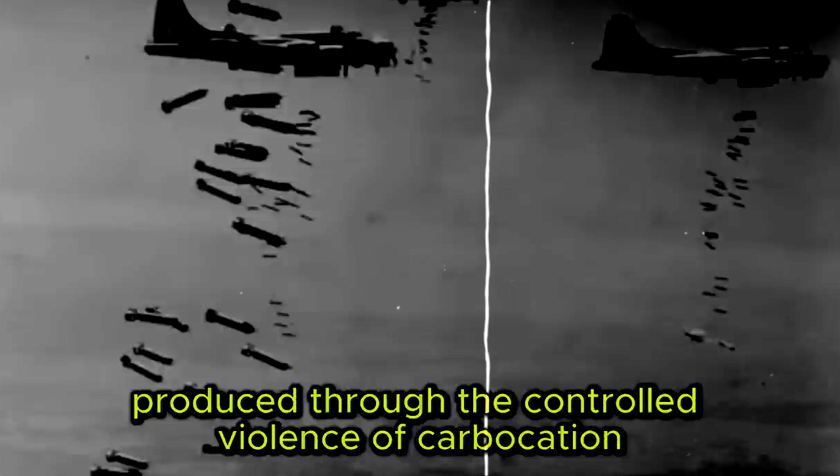It was synthesized in 41 reactors scattered across Texas and Louisiana, circulated through miles of Monel piping, cooled to 40 degrees Fahrenheit, and pumped into the fuel tanks of P-51 Mustangs and B-17 Flying Fortresses. It was octane rating 100, produced through the controlled violence of carbocation chemistry catalyzed by hydrofluoric acid. It gave American pilots a 64% horsepower advantage, a 40 miles per hour speed advantage, and a 10,000-foot altitude advantage. In aerial combat, those numbers weren't statistics.

They were the difference between the hunter and the hunted, between returning to base or augering into the channel, between winning and losing the war for control of the skies over Europe. The Germans knew they were being outflown. They could see it in the performance curves of captured American fighters, measure it in the climb rates and ceiling specifications. What they never fully understood was that they weren't losing to better pilots or superior aircraft design.

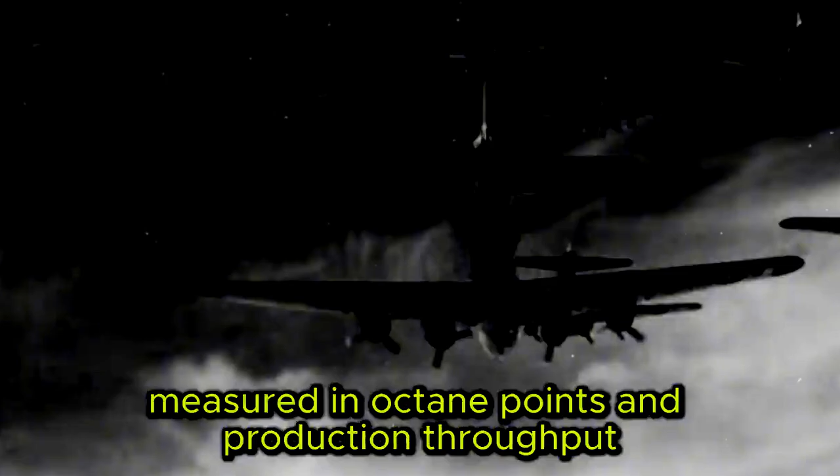They were losing to better chemistry, synthesized by an industrial process so dangerous that it would have been banned in peacetime, operated by workers who risked their lives every shift to produce a fuel that most of them would never see burned. The refineries at Baytown and Baton Rouge were as critical to victory as the shipyards at Norfolk or the aircraft plants at Willow Run, but they fought their war in anonymity, behind chain-link fences and chlorine gas detectors, winning battles measured in octane points and production throughput, rather than territory captured or enemies killed.

That's the deepest irony of total war. The decisive weapons are often the ones nobody sees, nobody photographs, nobody commemorates with monuments. Their industrial processes operated in the background of history, essential but invisible, dangerous but controlled, transforming base materials into strategic capability through the application of engineering discipline and chemical knowledge. Hydrofluoric acid alkylation was one such weapon.

It never made headlines, it never won medals, but it won the war in the air, 1 gallon of 100 octane fuel at a time, synthesized through chemistry so violent it could dissolve metal, and so precise it could be controlled to within 2 degrees Fahrenheit across a 500-foot reactor tower. That's not just engineering, that's victory through applied science, and it remains the most American way of war ever devised.